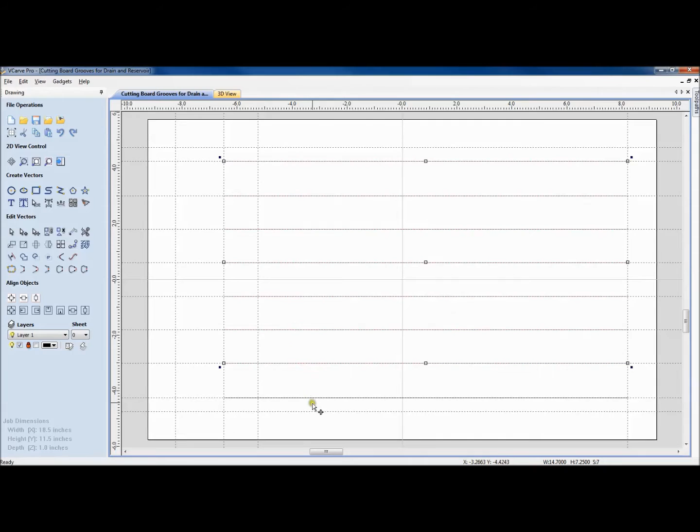So what we will do is use this tool to create a fluting toolpath. In this particular case, we're going to start at 0, and we want that flute to taper downhill like a gutter, going to a flute depth of 0.4 inches.

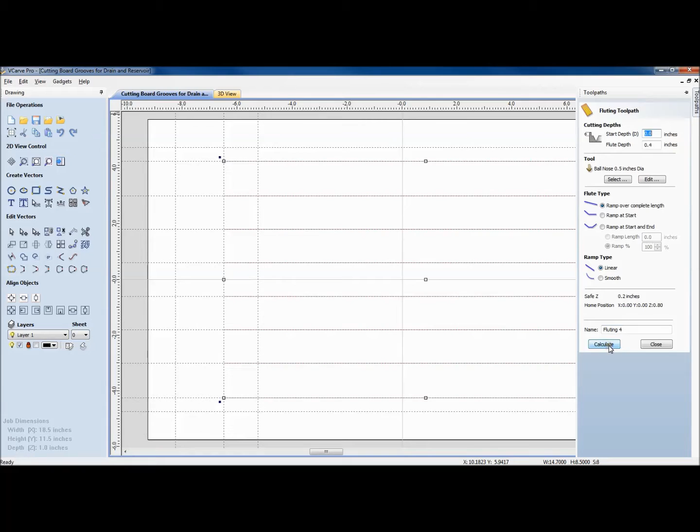I've got a ball nose, 1/2 inch diameter tool selected, and I have the ramp selected. There are a lot of different options here, and the ramp type is linear. I'll go ahead and calculate that so you can see it. At this point, I'll preview the toolpath, and you can see how I can cut that cool looking drain into the board.

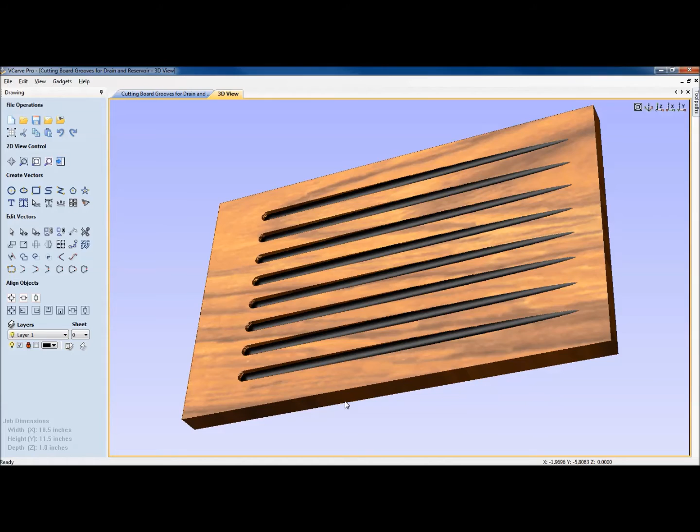From there, I would simply need to save that into the CNC Shark so I can cut it. But at this point, I just want to show you how to actually operate the flute tool. So I'm going to close that, and let's go back over here. Now at this point, I have that where I could cut it.

Now the next thing I'll do is use the rectangle tool, and I'm going to use a radius of 0.75 to round that off. I'll go ahead and make this area. I'm not quite sure why it does that, but I have to re-enter that 0.75 and click apply. Now we have the area which is going to be our reservoir.

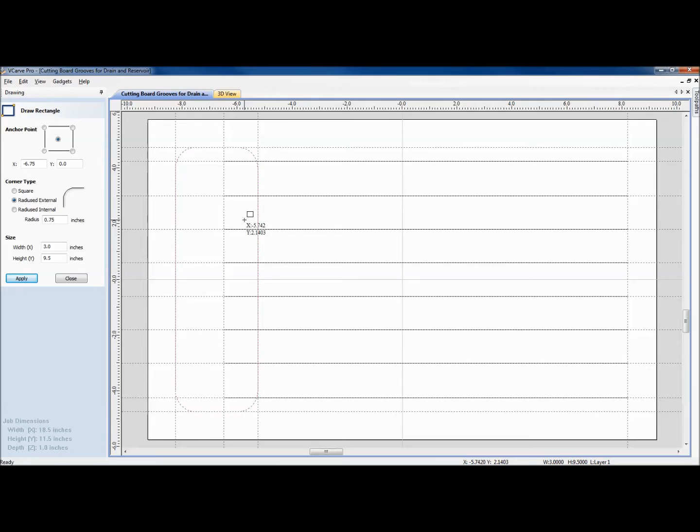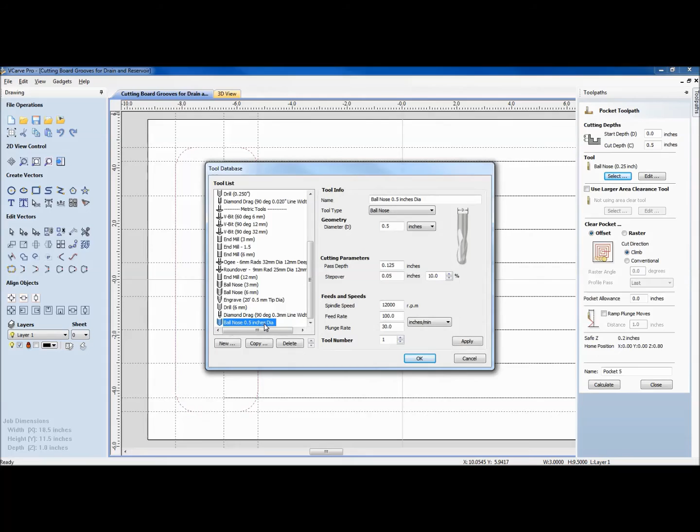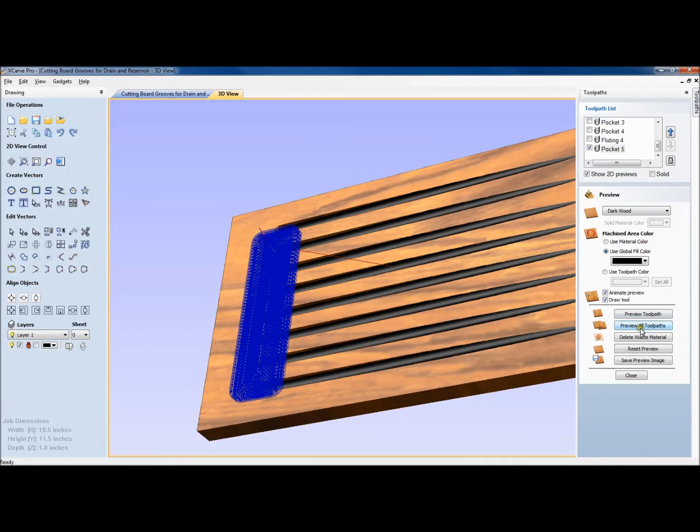At this point it's already selected, and the only other thing I need to do is select the pocket toolpath. In this particular case, I'll go ahead and select the ball nose, which I had to enter — that did not come with the default, but this is actually a very usable bit. If I simply select that ball nose bit, I'm going to cut down to 1/2 of an inch, and it will start in the center and work out. I'll go ahead and calculate it, and at this point I can preview the toolpath so you can see how that function is going to work.

The next thing we would do is go ahead and save that toolpath. You can see that's a pretty easy and straightforward way to use the pocket path and the fluting toolpath. You will need to cut this on the Shark in 2 different operations — the first operation is the fluting, and then the pocket is the second operation. Okay, so I hope that helps.

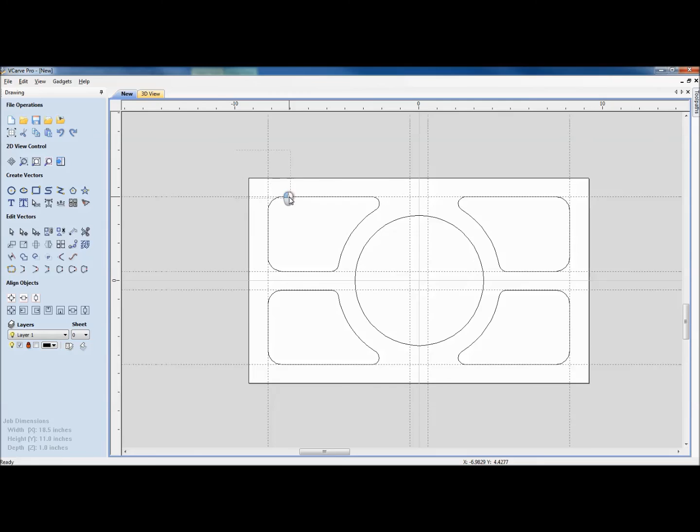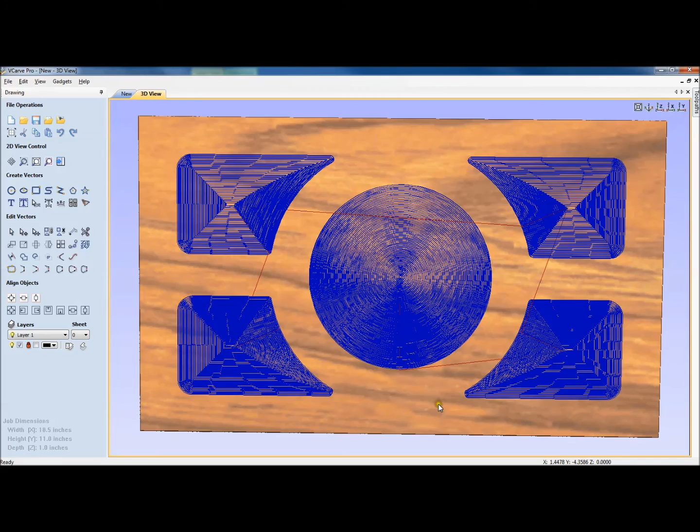So basically I've worked out the vectors, and I'll go ahead and select these vectors, and pick up my pocket toolpath again, using this ball nose bit that's 1/2 inch in diameter. I'll cut just to 1/2 of an inch deep, calculate that toolpath, and that's the toolpath I'm going to use. I'll go ahead and preview this.

It'll take a little while for the CNC to carve that, but you can imagine how that would be very appealing at a party, or even at home, just to serve the different foods that are available. I hope that's another idea you can use.